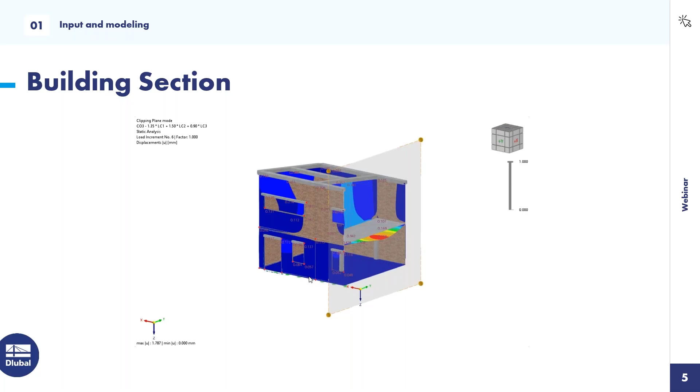In the first part, we will insert a small building in RFEM, and I want to show you how to do it. In the second part, I have chosen some separate models that I have prepared to take a look at some details. And as I said, the last part is the printout report. So now I want to switch to the program.

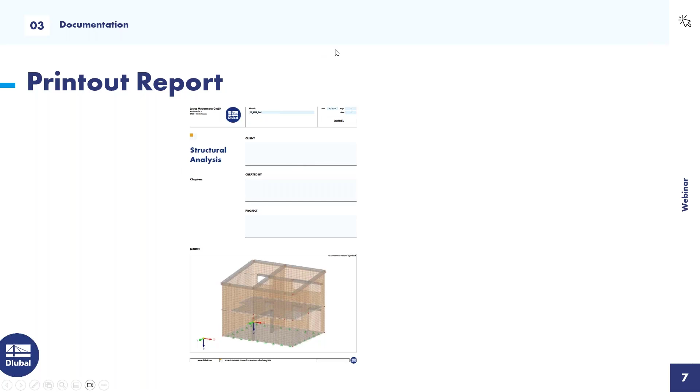Okay, I have already created a new file, a new project in RFEM. It is important when you create a new project and want to use masonry that you check the add-on Masonry. Otherwise, you cannot use the material model for masonry design. So as a first part, I want to create a new material.

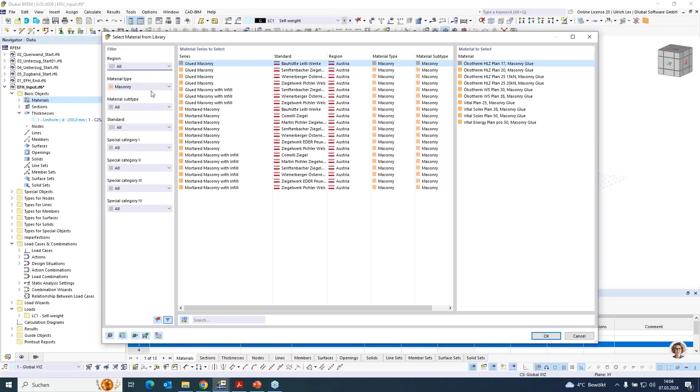You can use some values from the database as material type masonry. You can choose one product you want, maybe Porotherm 38, and you have to choose the material model, the orthotropic masonry plastic. If some products are not available in the database, you can also insert them manually.

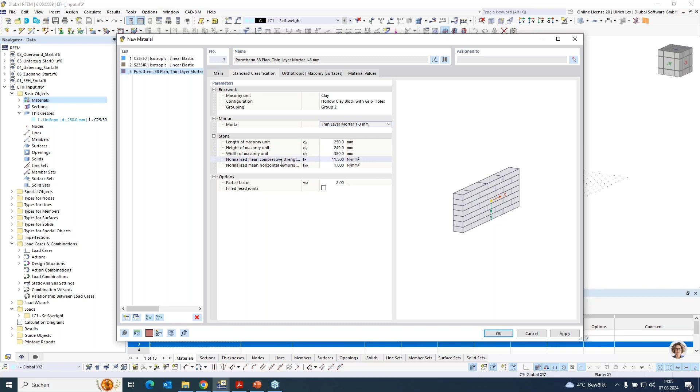In this tab, standard classification, you can choose the grouping of your product. You can choose the mortar you used. You have to insert the dimensions of the stone, and you have to insert the compressive strength. With all these values, RFEM automatically computes the data needed for the material model: the modulus of elasticity, the shear modulus, the allowable or ultimate compressive strength, or the ultimate tensile strength.

So I want to create now a second material, maybe for the inner wall. It's the same as before. Choose one product, maybe this Porotherm 17-50, and go with OK. The second thing I want to do is to create a thickness. All surfaces need a thickness. The first thickness is already in, it's 250 millimeters with concrete, for the foundation maybe.

The second thickness I will create is 200 millimeters for the concrete slab. For the third thickness I want to use our masonry material, 380 millimeters. And for the fourth thickness, I want to use the material for the inner walls with thickness 170 millimeters. When I have done this, I can start with the modeling.

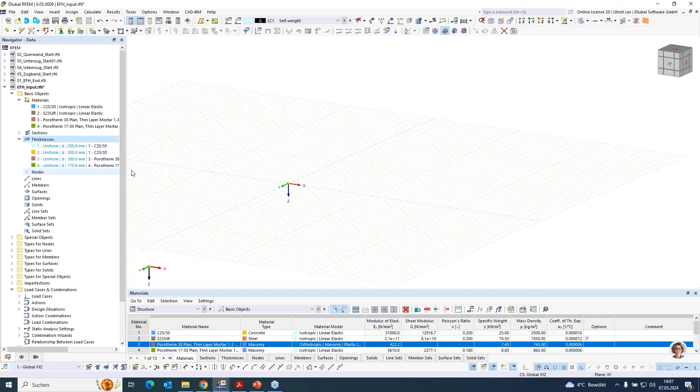Here I have a building with the dimensions 7 by 9 meters. I use my grid points to create the first floor, 7 by 9 meters. I can directly assign here with this select boundary my foundation plate, thickness 250 millimeters concrete. Okay, and choose the lines.

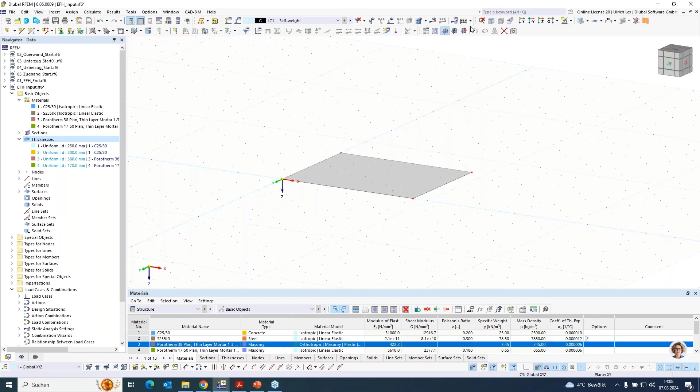So in the second part, I want to change my work plane and create a new surface. I want to choose now the thickness for the outer wall. Okay, with a height of 3 meters. I can change my work plane and create the second walls. Now I can directly copy these walls, and the first things are done.

Now I want to create the first concrete slab. Okay, and choose the outer lines.

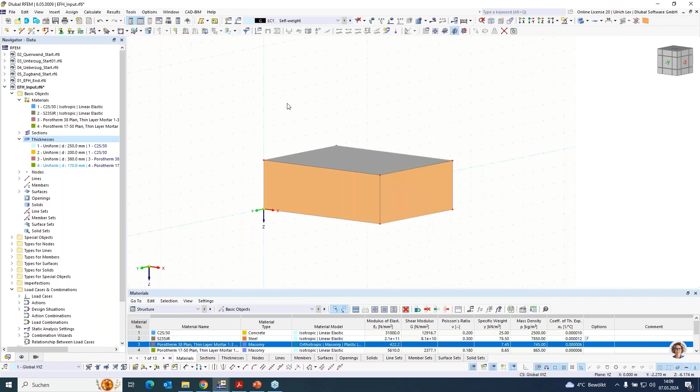So the second floor will be in the front a height of 4 meters and in the back a height of 3 meters. As I did before, I can use select boundary with 380 millimeters.

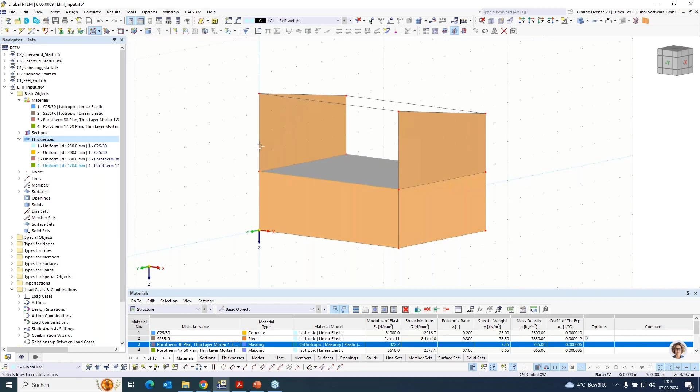And can select and copy this surface, and at the end, the wall in the front and at the back. Choose all these lines, turn around it, and choose the rest of the lines.

Okay, now I want to create my inner walls. There I select only the ground floor, change my working plane, and start to create the lines for the inner walls.

1, 2, 3, and 4 meters. My grid has a space of 1 meter, so I can use it here directly for my modeling. Change my working plane and just copy the lines to these points.

So the second wall is in the second floor. So I cancel my visibility mode and create here new lines.

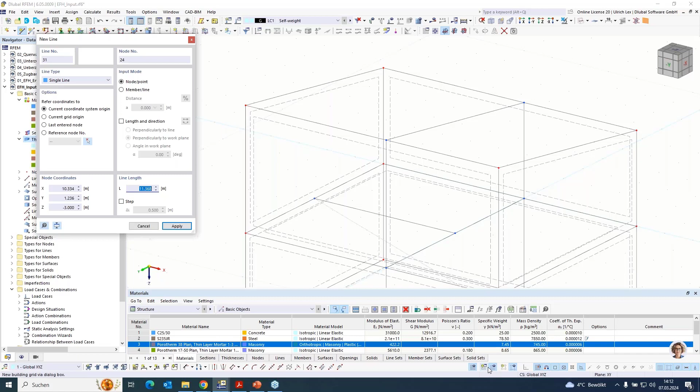Here you can see when I cross the line, then one point is caught automatically. This can be set in the detailed setting for catching the lines.

So now I have created all lines for the inner walls. Then I want to choose select boundary for creating a surface. Choose my thickness from the inner walls. The material is automatically changed. Okay, and choose here my walls.

Here. And the third one. So now all my walls are created.

As the next part, I want to create some openings, like a window or a door.

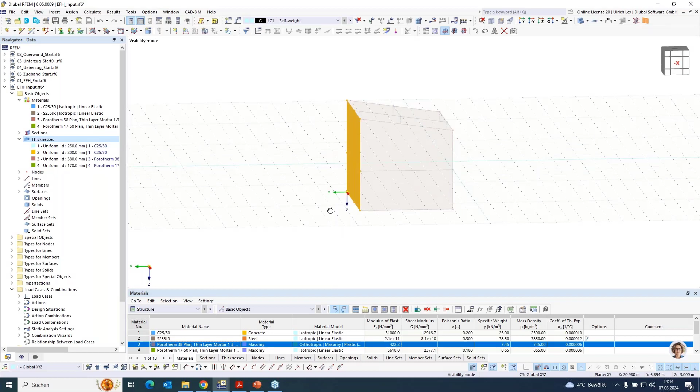I select again my wall in the front, change my work plane in this plane I want to work. I change my space of the grid points, divide the space 2 times.

And now I can use the option create a new opening with 250 high and 150 width. I create a new window.

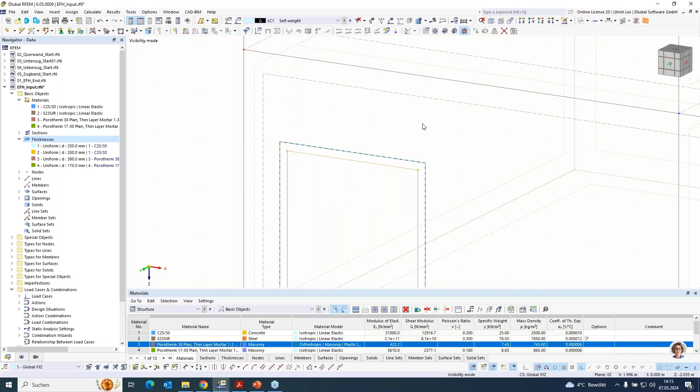Here it's one. I just want to change it to 2.50 meters, and create a window with 1 meter to 150.

The same maybe in this part, and the same in the second floor. Maybe a little bit bigger window, and the same here.

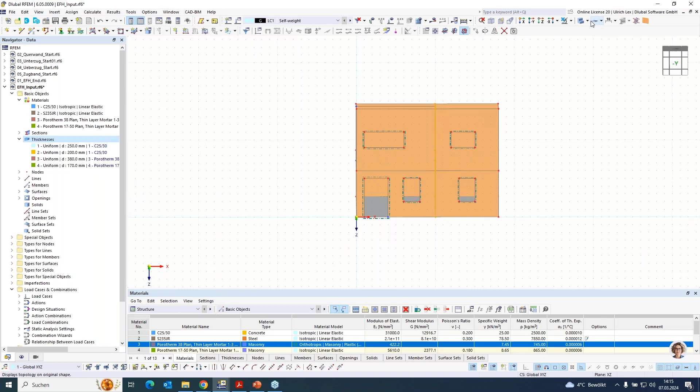In the inner wall, I want to have a door too. So I select my inner walls. I can switch off the background, the hidden objects. For better modeling, I can change my working plane, select the grid point.

And can create now here a big door.

So in case of using material masonry, it is important in case of openings that you create something like a lintel above. If you do not assign a lintel, it could be that the system will be unstable because of the missing tensile strengths, or the missing ultimate, or the very small ultimate tensile strengths in the area above the opening.

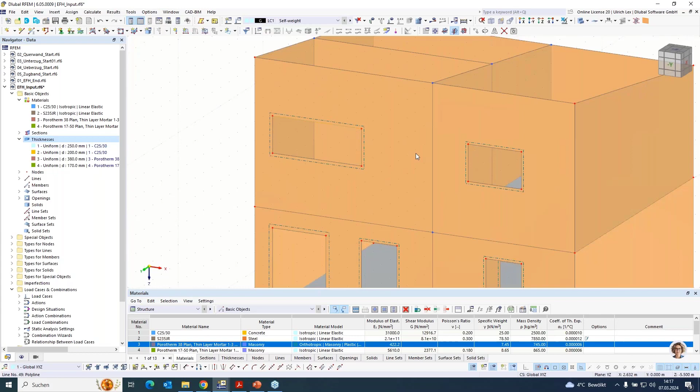So that's why we create here now a lintel. I double click on the line, create a new member. It's a member type beam.

I want to select a new section. I can create a new section, maybe with the width of 380 millimeters and the height of 150 millimeters. Material concrete is okay.

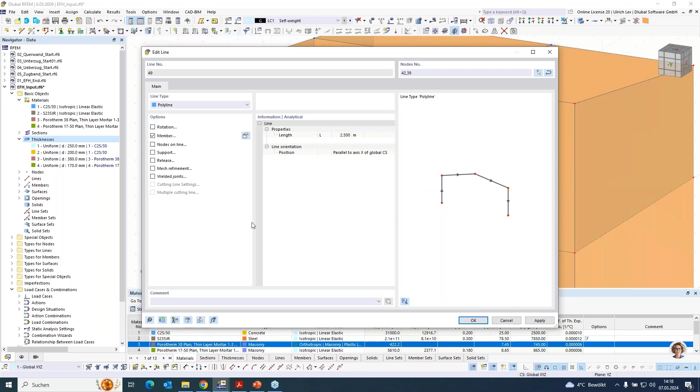And the second thing is, when the window is too big, then it is good to have this lintel a little bit inside the wall. It's because the force from the lintel does not directly insert into the material masonry in one FE node.

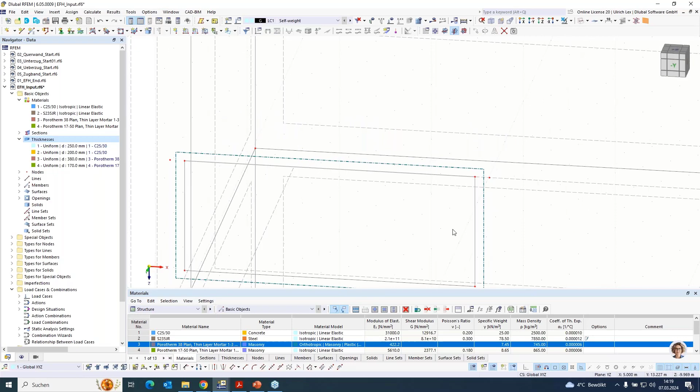So that we create a copy of this node, create a copy in X direction, maybe 125 millimeters, and the same on the right side. And create here a line and a section too.

Okay, and okay. The same for the other openings. I select all these lines, double click, and assign a new member.

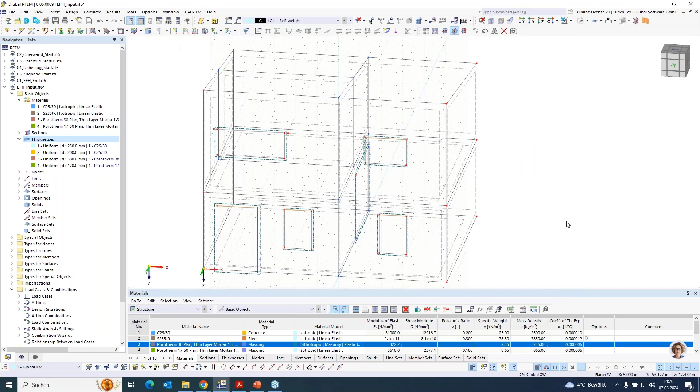Okay, the same I will do in the inner wall. I assign a new member. Here I use a little bit bigger section, so I create a new one, maybe 170 millimeter width and 250 millimeters high.

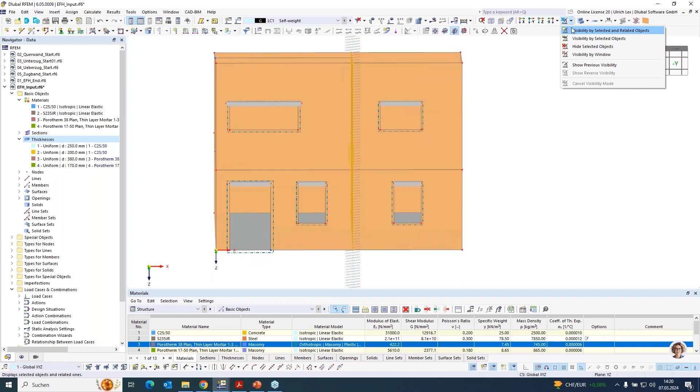Okay. Here I could create, I could let be this lintel in the masonry wall too. It would be maybe good on this place, but this example I will have in the details.

So the next part on such a building is on the top of the masonry. We need something like a ring beam. You can create it easily in RFEM when you select all lines where you want to assign such ring beam, and can assign again one member.

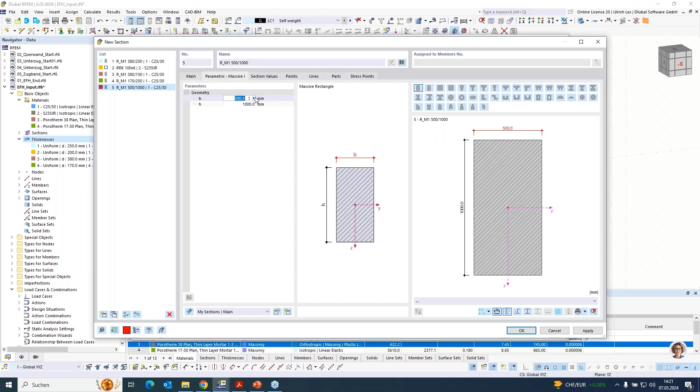Choose a section, create a new one, maybe 380 and 250.

Okay, apply with OK. And then you have created this ring beam.

So as a last part for modeling, you have to take a look on the wall slab connection. It's a very special thing for masonry buildings. Each time on a place where the masonry wall does not stand fully on maybe a concrete slab, you need a special connection.

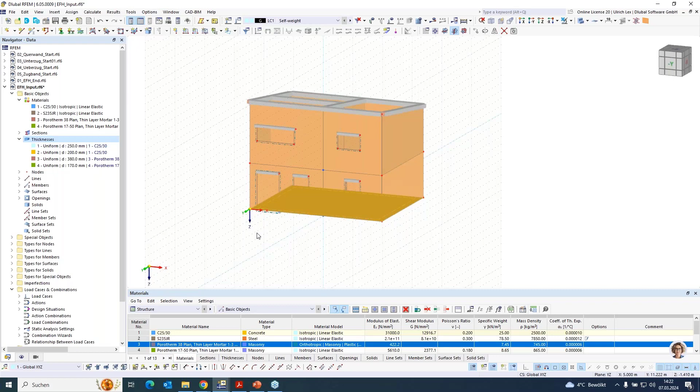It's called in RFEM slab wall connection, and you can assign it if you double click on the surface and assign a new hinge. Create here a new line hinge, and here you will find the option slab wall connection.

As I said, it's to use each time where the masonry wall does not stand fully on the concrete slab. In case that the wall stands fully on the slab, then the material model itself can handle it. Only in case that the wall is not completely supported, then you need this hinge.

So if you have checked on the option, you get a new tab with wall slab connection. Here you can insert the offset, maybe 150 millimeters. If you have a block width, then you can insert it. If not, then we let 0.

We have to choose the lines where this hinge should be assigned. It's all the lines, all outer lines. Oh, just I had to go back one step.

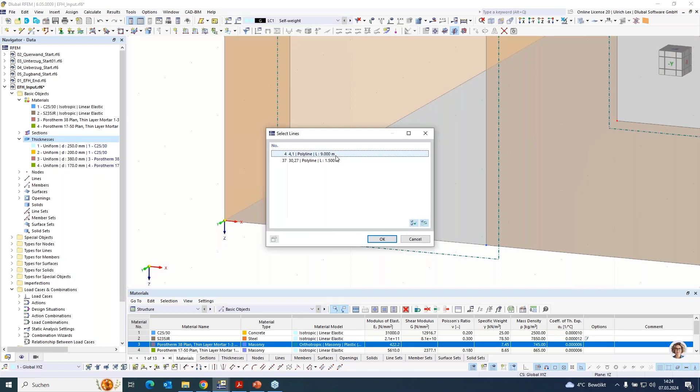I had at first to connect these lines and members, because here I have a double line, so I just use this option connect lines and nodes. So I will have no double lines and nodes in the system.

Then I can assign this hinge again, create a new line hinge with wall slab connection with my offset 150 millimeters, and assign it all these outer lines.

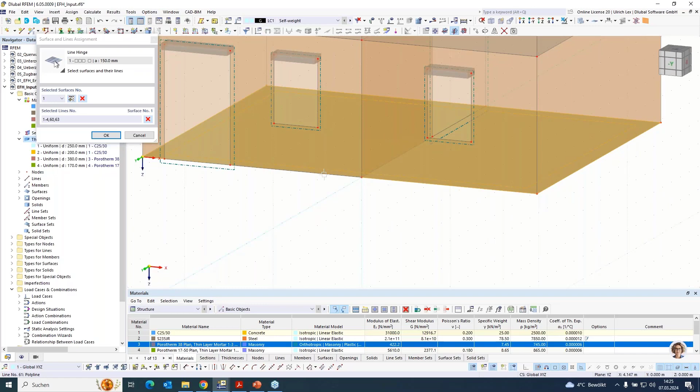Continue with OK. And now it's important to generate this line hinge with this button on the left. Now 2 line hinges are created. I can continue with OK, and I will see that my line hinge for the masonry wall is created.

Here I can double click. It's yellow because it's created from the master line hinge, and here is a force moment diagram assigned.

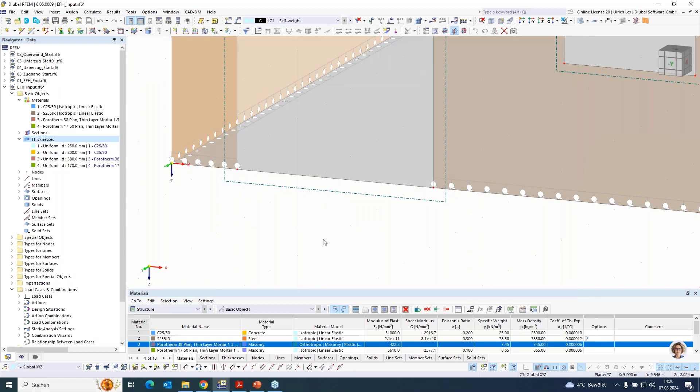Okay, the same I will do for the slab in the first floor. Double click on the surface, assign a hinge, create a new line hinge using slab wall connection.

If I have the same offset, I could use the same hinge too, but now I generate a second one. Choose all outer lines. Continue with OK. Generate the lines. Continue with OK.

And now I can see that for the wall above and the wall downside created as two separately hinges.

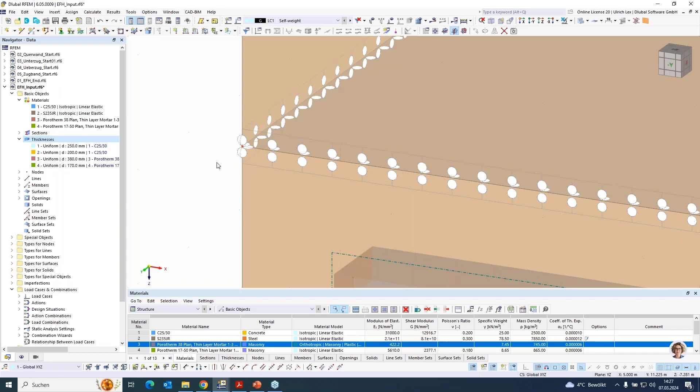Okay, and on the last step, I had to create some loads. The self-weight is created automatically. As a next step, I will create the live load, imposed load.

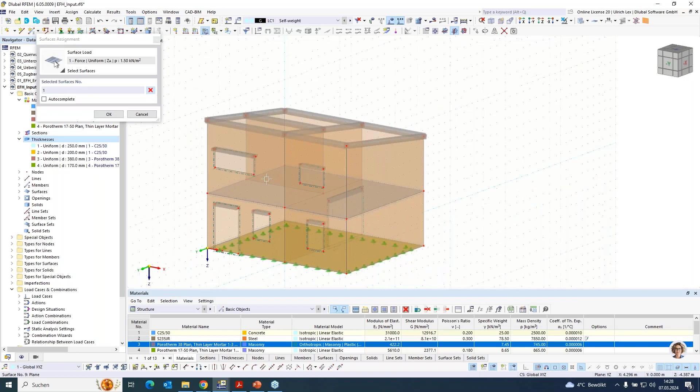Okay. Choose maybe for the self-weight 1.5 kilonewton and assign it to my slabs. Okay.

And the same for the imposed load. Maybe 1.8. And continue with OK.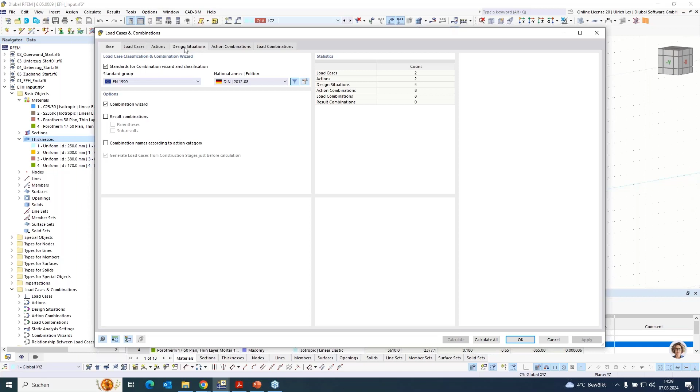The combinatoric is done automatically if you have set the combination wizard on. Then you can choose the design situations. You can create a combination wizard where you can choose a static analyze setting.

For masonry, it's good to compute geometrically linear or large deformations. It's the best for the material model.

And for the nonlinear plastic material, it's important to increase the number of load increments, maybe to 3. You can allow a little bit more iterations, and here you can save the results of all increments.

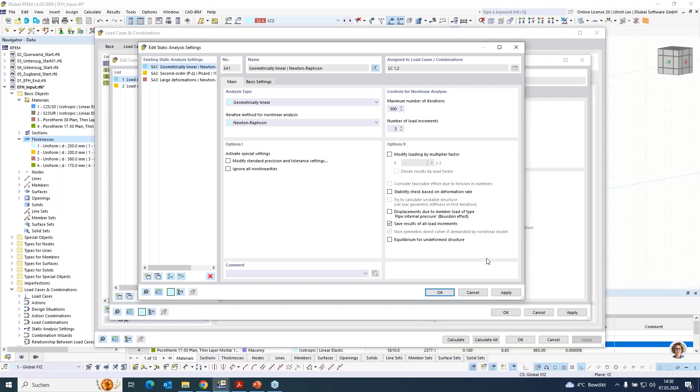Then you can take a look on the increment 1 or 2 too. Okay, continue with OK, and you get now the load combinations here.

So as a last step, we can take a look on the mesh settings. For masonry, we use normally something about 0.25, 0.2. You can OK and apply. Then the mesh will be created.

Please be a little bit careful that you have a good mesh, because it's very important for the calculation, for the nonlinear calculation.

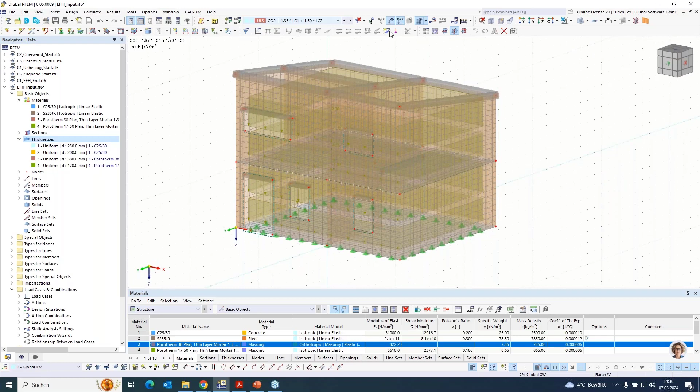So after that, we can compute the first load case, and when it's computed well, then we can go to the second part, to the details. Here you can see the calculation process where the system is computed with the first load increment, now the second, now the third, and then it should be finished. Exactly.

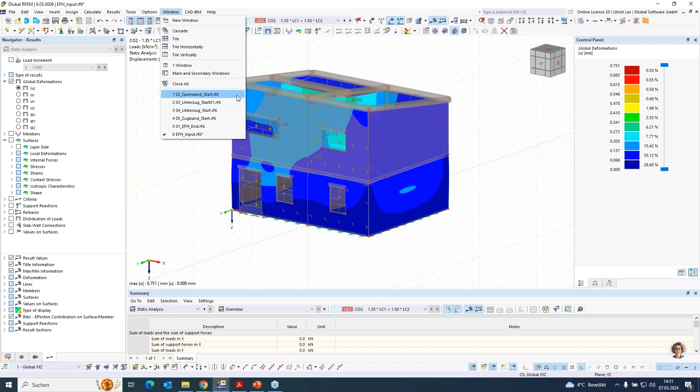Okay, now I want to switch to my detailed systems, and here I have the first one, a part of masonry where you have maybe some outer wall, exterior wall, and one interior wall. Mostly you have two different materials, maybe as I chose before, like a wall with 380 millimeters width, and for the inner wall, a different material with 170 millimeters.

If you build up these walls, then generally the outer wall is created, and after that the inner wall will be created. So the connection between these walls is not rigid, I would say.

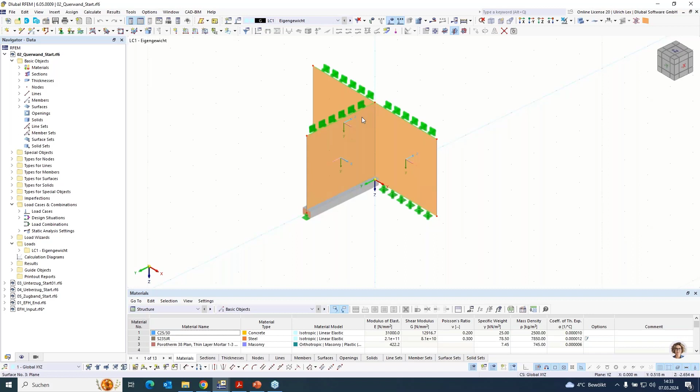There are a lot of things you can use. One thing is you can use such a wall connector. I looked on the internet and found something like this. This is a wall connector. It is assigned in each row of the masonry stone and connects these both walls. But this wall connector cannot transfer some shear loads, I would say. These connectors can only transfer tensile loads. So how do you consider this in RFEM? I want to show you now.

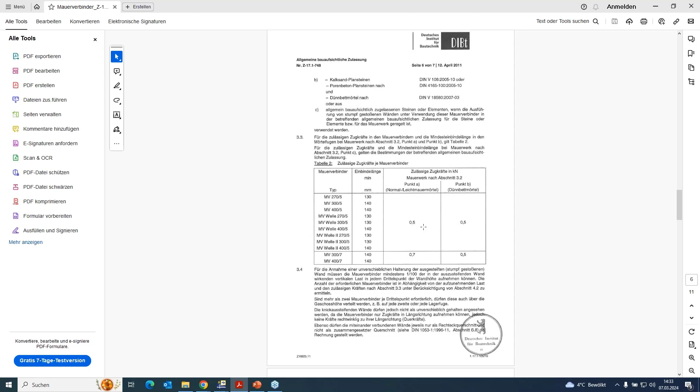When I take a look in the data sheet, I find that one connector can have a maximum tensile force of 0.5 kilonewton. It's assigned in each row, so you have 0.5 divided by 0.25 from the height of my stone. Then I will have a force of 2 kilonewtons per meter in this edge.

To create this, I can use the special object line release and create a new one. As a release type, I can choose a partial activity in Y direction. This partial activity means the connection is released from a force of 2 kilonewton per meter. In the pressure direction, I would say it's fixed now, but here you can release it too.

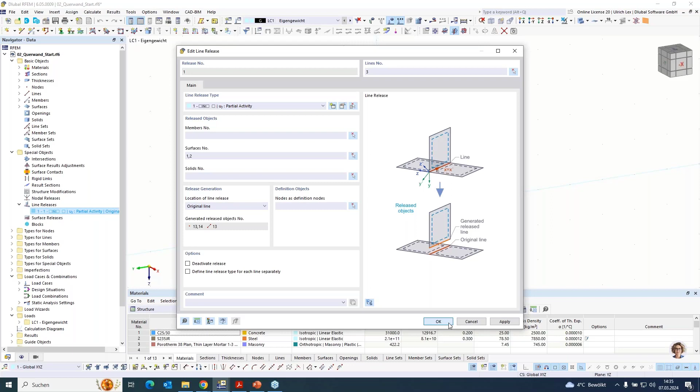So this release I can assign to the surface. I can say my released objects after that are the surfaces. Continue with OK. Now the whole line is released.

That's why I have to assign on node 14, this node, a new support. My system will get unstable. Okay.

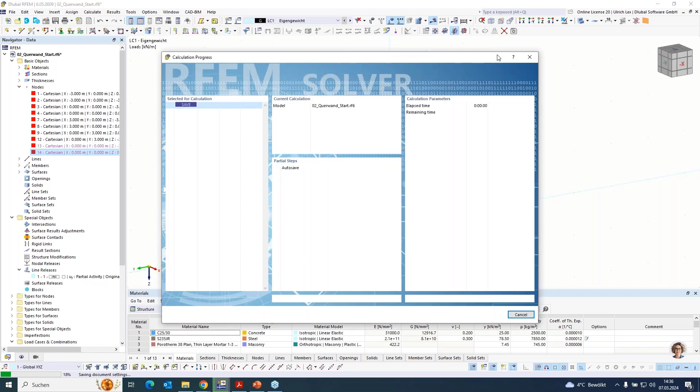So after that, I will create a new force, maybe a horizontal force of 15 kilonewton in direction Y, and compute this system. I set it as before, like about 250 millimeters. Here I increase the load increments so I can show you the results better.

So you can see that the inner wall is released from the outer wall. When I go some load steps back, maybe in the first one, we can see that the lines are connected. We only have a force of 1.4 kilonewton. And when I increase the load, you can see that the release of this inner wall is getting on.

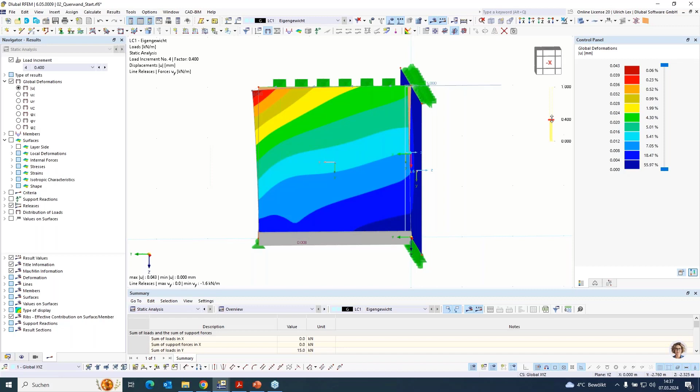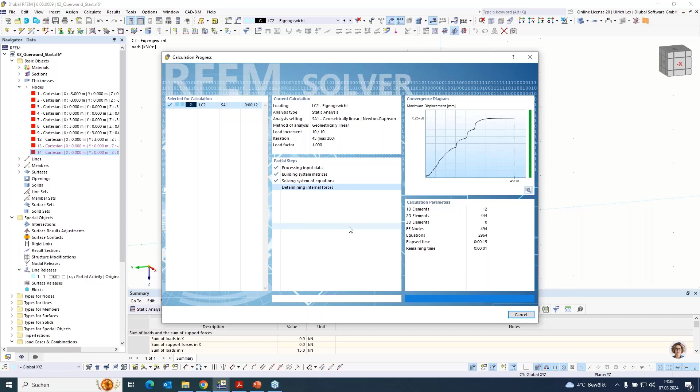As a test, we can create a second load case where I copy load 1 and change the direction of the load. And here it should now be connected to the outer force, to the outer wall. And this is exactly what we want to have.

Okay, as a next example, I want to show you my system with the lintel. Here I have the problem that the connection between the inner wall and the outer wall is not, I would say, connected. Only the lintel, or the force from the lintel, should be reacting in this outer wall.

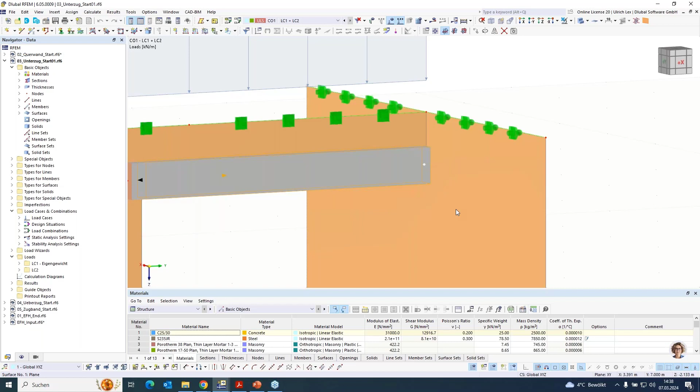So I can continue as before and create here a new line release. I assign it to this line. Now I choose the release type fully, because I'm not sure if on this place there is really a wall connector built. So, on the safe side, I did not connect these two walls at this place.

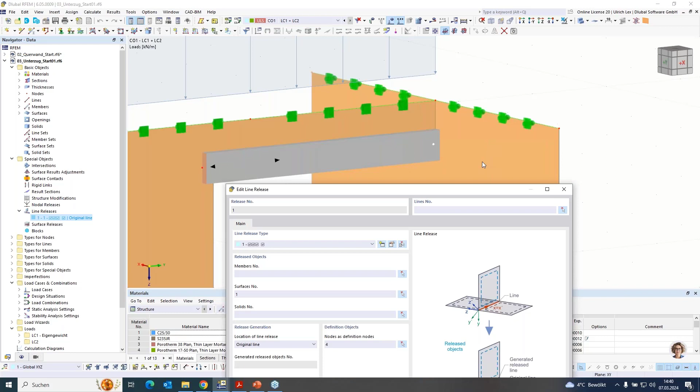So I have to release the wall. And now I want that the force from the lintel acting is not released — it should be acting on this outer wall. That's why I can define this definition object, my node 4. So there is no release created, and the force is acting on the outer wall.

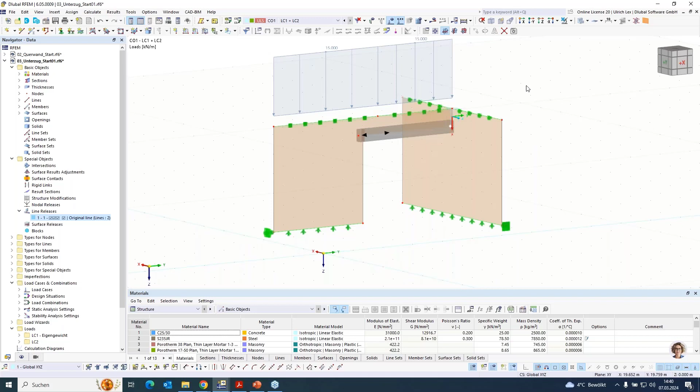Continue with OK. And now I see that on this one node, no new node is created, and here a new node, a release node, is created. Okay, just take a look at the results.

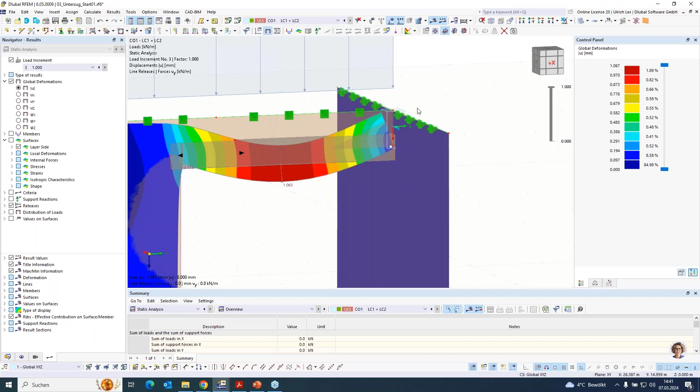And when I take a look on the deformations, I see that my masonry material is released, and my lintel, my force is acting on the outer wall. I can also see this when I take a look only on the outer wall. And here I see that the whole load from the lintel is acting on this FE node, on this one FE node.

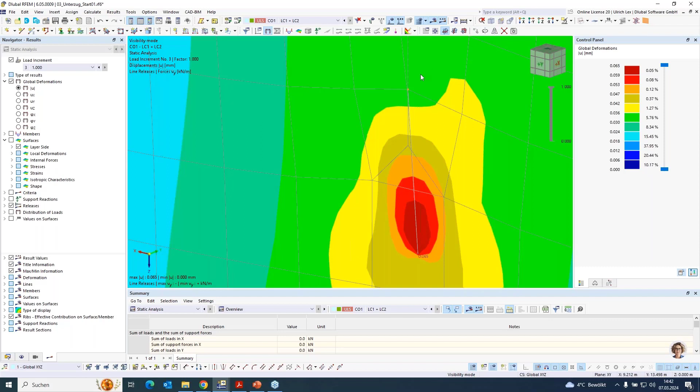Maybe this could be also a problem, that here so much load is acting on one node. If this is a problem, then you have the possibility to copy this one node, and a second time in the other direction, and create here or assign here a small beam, maybe a rigid beam. A rigid beam so that the force is smoothed in this point.

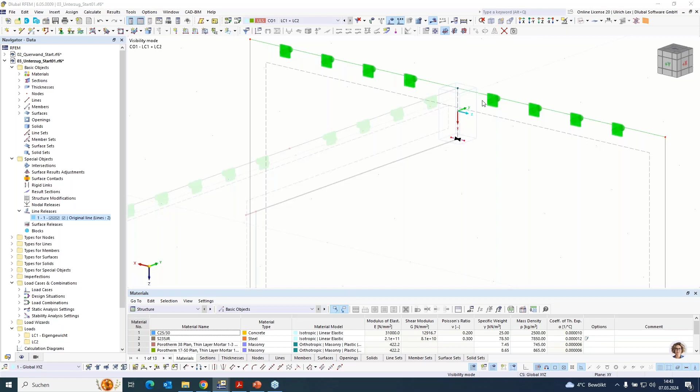If you take a look on the results, it should be the same as before. Only the force in this one node is a little bit smoothed. So this could avoid some problems if one point of the material is overloaded.

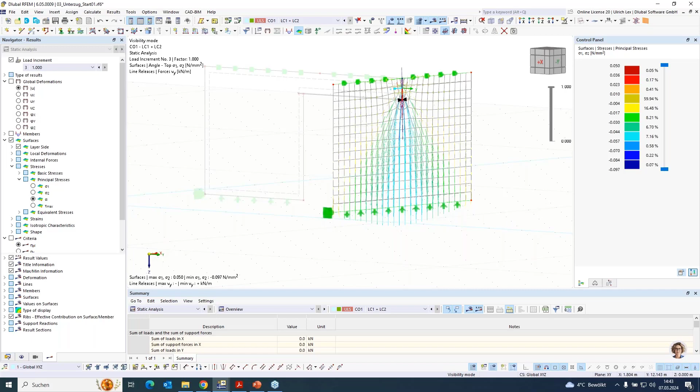So here you can see when you take a look on these criteria, and maybe not the criteria. If you take a look on surfaces and the stresses on this alpha, you can see the load distribution in the wall, and you can see that we have, like it's common for masonry, a distribution of maybe 60 degrees in the wall, and the same you can see in the support reaction, where we have in this area this load from the lintel.

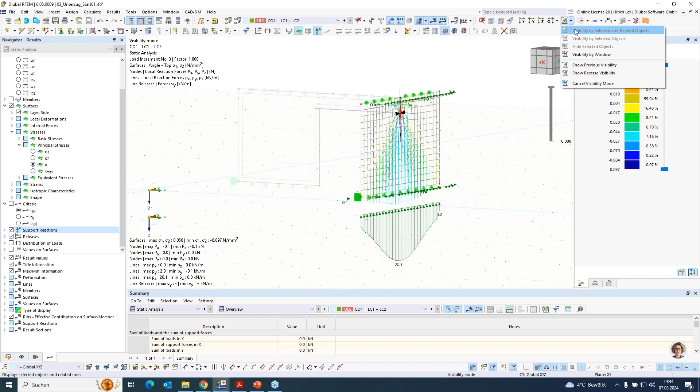Okay, on the second side, there could be problems too. When we have here now a too big force from the lintel, it's depending what is on the floors above. It could be that on this place maybe a concrete column should be located, but this is also easy to do.

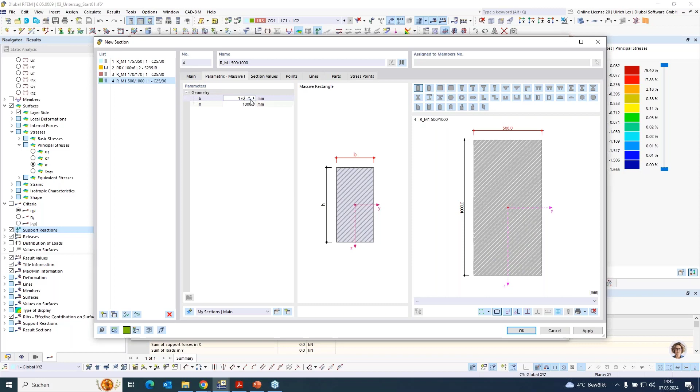When you double click on the line, you can create again a new member, as a beam, and create here a new section. Maybe 170 to 170, as a concrete column.

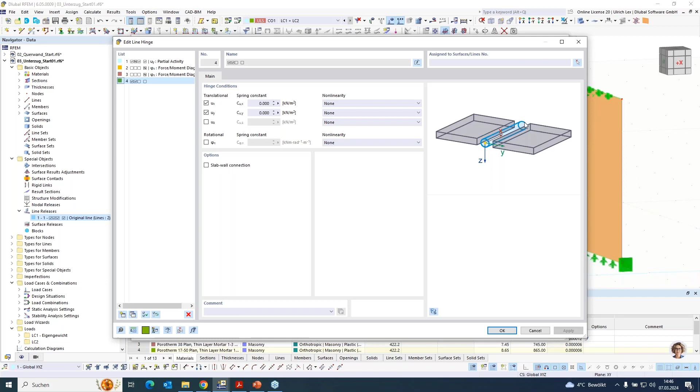So one thing you have to think about is that the masonry wall is now connected fully with the concrete beam. Here you can insert again something like a new line hinge, and maybe let it free in Z direction, so that no shear force is between the concrete column and the masonry wall. Okay.

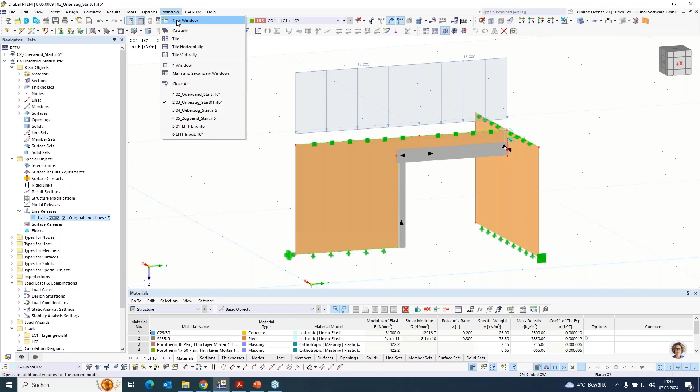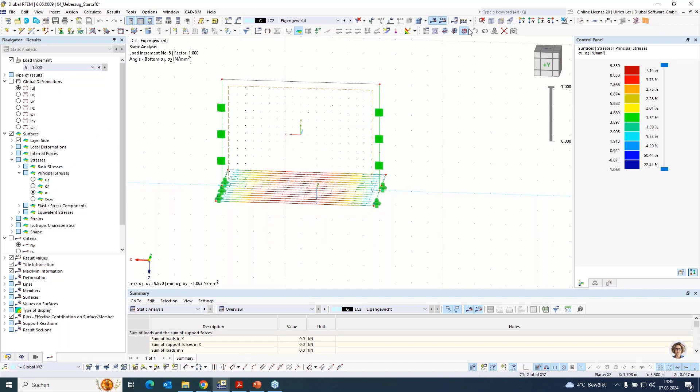Okay, so these were the problems of this example, and now I can take a look on the next example. When you have something like a wall above a concrete slab, where you have no support in the floor below, then when you take a look on the results, you will see that the masonry wall is acting similar to a beam. You will have some forces like a pressure arc in the masonry wall.

Normally we only have to know it, because when an opening should be created here afterwards, then this pressure arc is destroyed and the behavior of the wall is different, and therefore you need maybe more reinforcement in the concrete slab. I want to show it now.

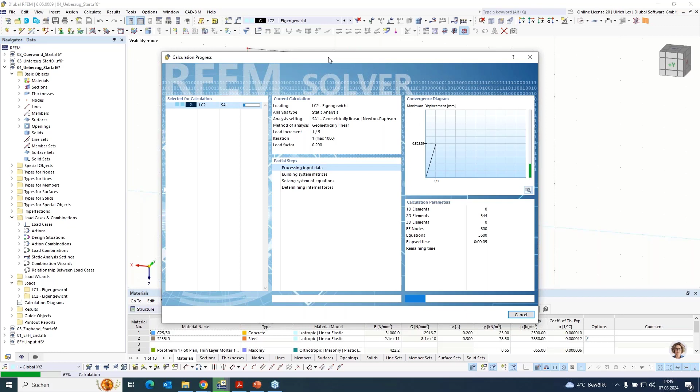When we take a look on the deformations, here we have 7.9 millimeters. When I create now an opening, maybe for the heating or something else from the house technique, then you will see that the deformation of the wall is increasing a little bit. Therefore, you need more reinforcement in the concrete slab, and you have to consider it in your static model.

So you see the deformation is a little bit higher. When we take a look on these trajectories, you see this pressure arc is destroyed. More forces are acting on the concrete slab. Therefore, you have to consider it.

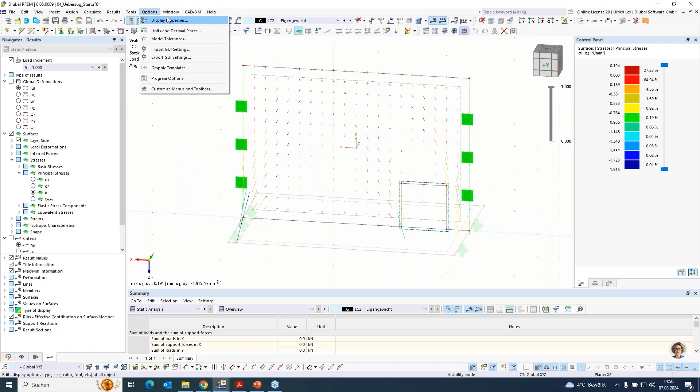So the last example is one example from the roof, from the top floor. Sometimes you have to consider some wind loads, tension loads from the ring beam, and have to anchor this in the concrete slab. This you can do easily when you create a new beam.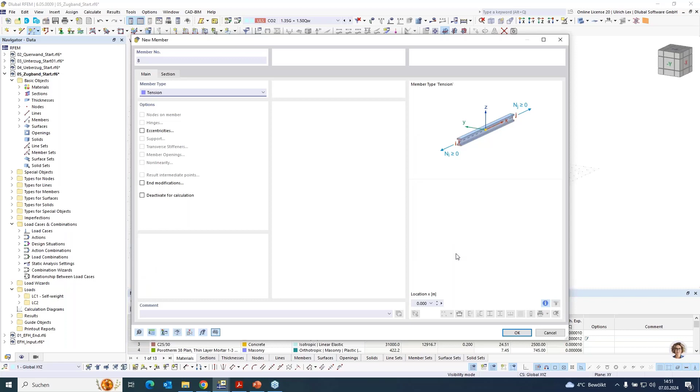You can here use the tension beam, and you can insert this tension beam into the surfaces, maybe like this, and tension, and like here. Here I want to change the section. I can create a new section. I have created already maybe a section of 12 millimeters.

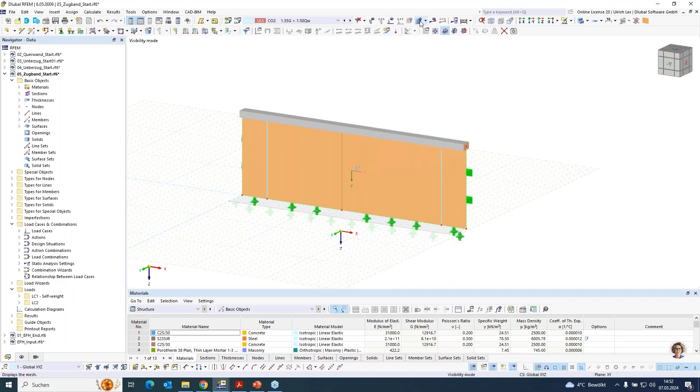Okay, as a tension. But now when you create the mesh, please be careful, because you are now using a tension beam, and the tension beam is not meshed, it's only meshed on the end points. And here it's integrated into the surface. Therefore, we have to double click on the surface, go to the tab Integrated, take off the automatic detection, and take off these two lines. Therefore, only line number 5 is integrated.

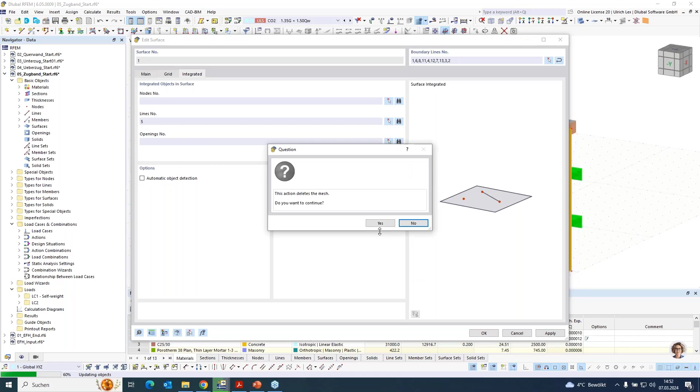Continue with OK. This means that this beam now has no connection to the surface. Now when you create a new mesh, then everything is okay again. I have created a load like tension in this direction. When I now compute it, you will see that the force is acting in the beams.

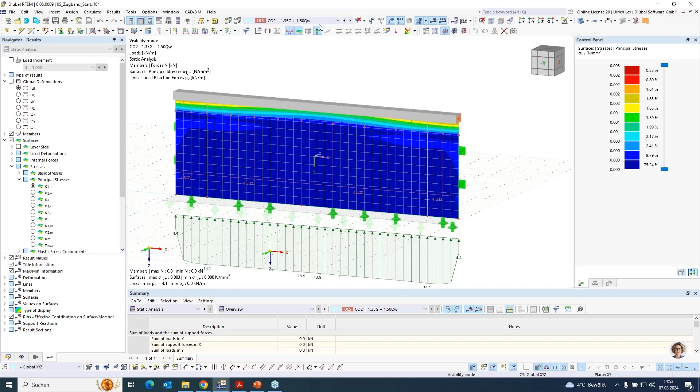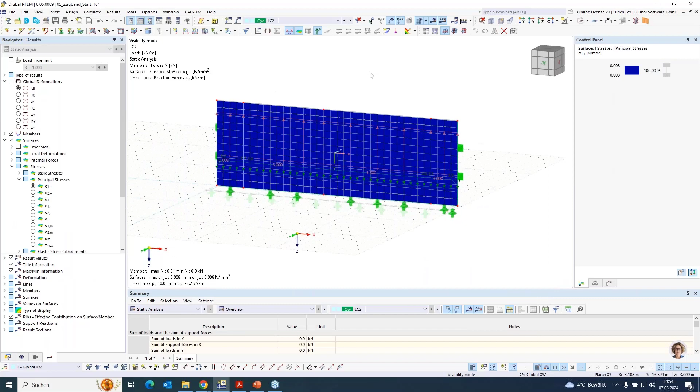Or not. Where is my mistake? Just one moment. Somewhere I must have made a mistake, but I want to switch to my second file.

So here you now see that the load is acting on the tension beams and not on the wall. So that it is not acting on the wall, you had to additionally assign a line hinge, so that the ring beam is not connected to the masonry wall. Here I created a new hinge with the nonlinearity that it is fixed if the force

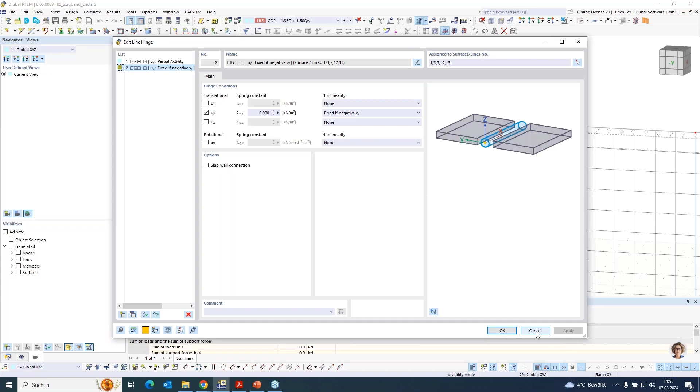is negative, and that means if the force is tension, then it is free, and if compression, then it is fixed. Okay. And here you can see that in the wall there are no loads from the wind suction. It's only in the concrete slab.

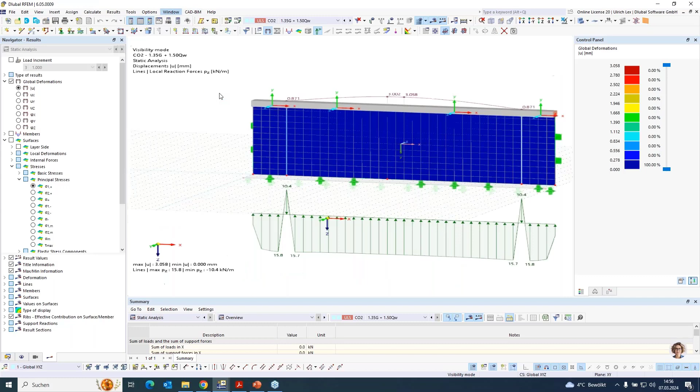Okay, with this part done, I want to switch to the third part and go back to my building we created before. For the documentation, you can use everything we have available in RFEM. The most important thing, I think, is the stresses. You can take a look at the strains, because when the strains are too big, it is a hint that cracks exist in the masonry. I showed it in a webinar before, on the sliding slab on the edges, where cracks are here.

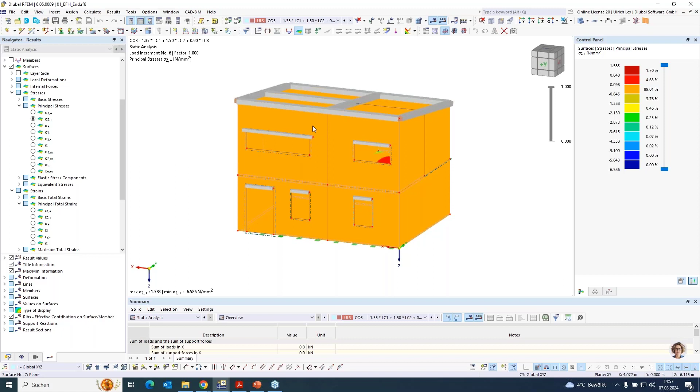You can take a look at this criterion. This criterion is a hint where the masonry is in plasticity. It's not a hint that it's overloaded. There are two states: one is the plastic state, and blue is the linear elastic state. But here you can see where big loads are in the system.

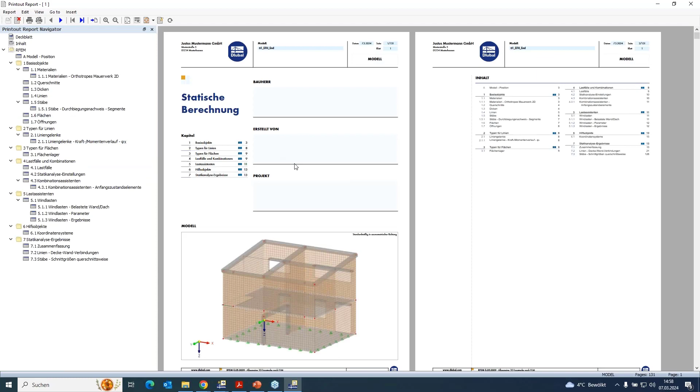And of course, we have the printout report. If I open the printout report, you have a lot of tables, a lot of things implemented. Everything you have inside, and you have also documented the things from your material. I just want to switch the language. You have also documented the material properties of your masonry.

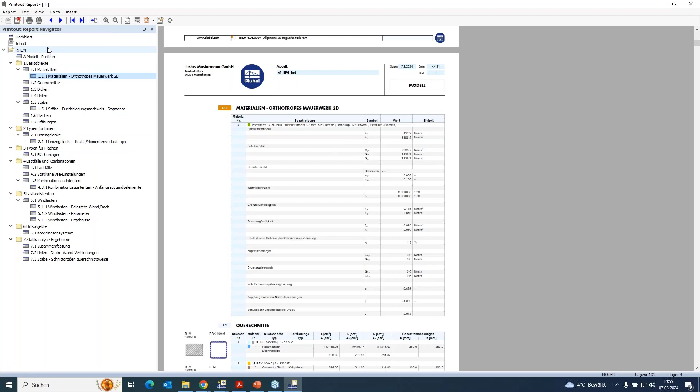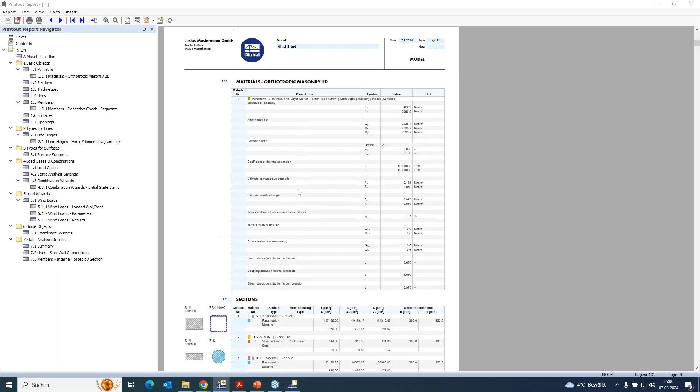Just set the language to English, and open it again. So now it's okay. Here you can see the ultimate properties of your material that you have used for the calculation.

A design check for the material does not exist because of the calculation. It's a plastic calculation, so we cannot give any ratio. Only when the calculation is fully done is the ultimate strength okay. And this is the design check, the only design check we have.